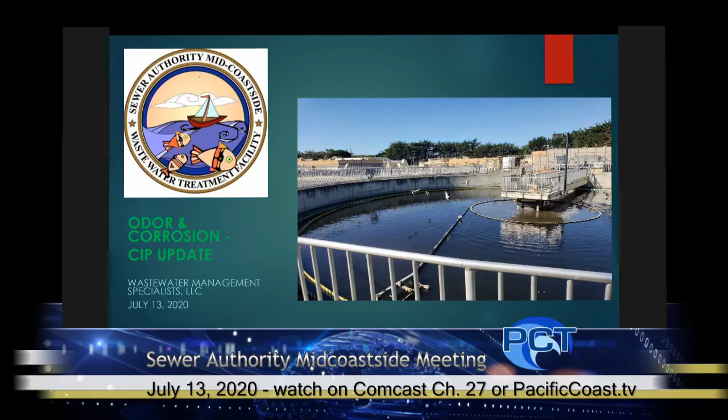So we're hoping, yeah, that noise, I don't know what that is, but it's good. We're hoping that by taking care of the treatment plant, the IPS, and the pump station systems, odors and corrosion will improve. When I talk odor, odor is a big part of the issue because we don't want to cause problems for our citizens having to smell things. But corrosion is hand in hand with odor in the system that we have, and corrosion is really a big deal for SAM. As a matter of fact, let's go through some of these photos now.

We've talked about the corrosion at the treatment plant in the past, and it continues not only at the treatment plant but out in the collection system. There are several things that cause odor in a treatment plant. One is what's referred to as long detention time - the amount of time it takes for water to leave a house and get to the treatment plant. In some cities, that's a couple of hours. In the SAM system, it's several hours by the time it comes all the way from Montara down, and even in Half Moon Bay, some of the more southern areas take several hours for the water to get there. One of the problems is when it's moving slowly like that, the solids tend to settle out in the pipe. You always have a slime layer in a pipe because bacteria and nutrients are going in there.

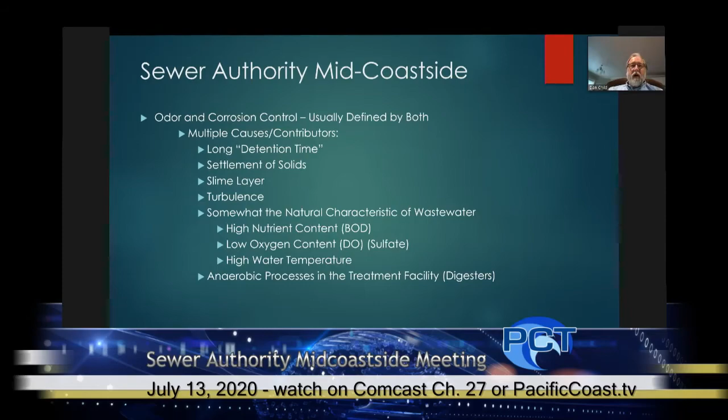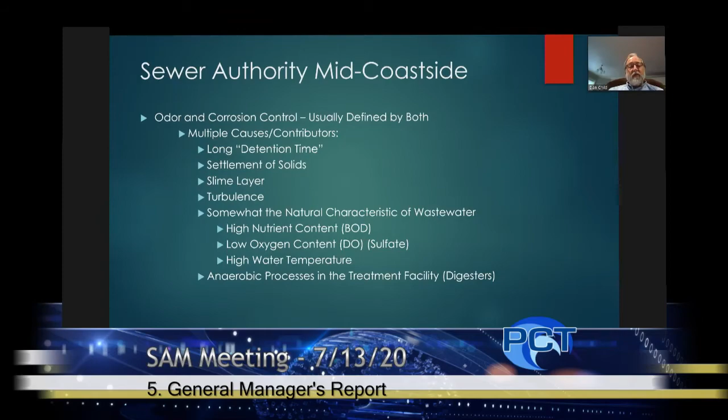Turbulence in the system causes the chemicals in the odorous properties of the water to escape into the atmosphere, and that's when we get both odors and the corrosion associated with that. So natural wastewater has a high nutrient content and very low dissolved oxygen, and once that oxygen is gone, bacteria naturally look for other oxygen sources - they have to have oxygen. The most common source of oxygen in wastewater is a compound known as sulfate, a sulfur compound. The bacteria break the oxygen off of that sulfate and release sulfide ions, and from there you get more chemical reactions that create hydrogen sulfide, which is the primary compound we're worried about as far as both corrosion and odors. Hydrogen sulfide is commonly referred to as rotten egg gas. It smells very strong and can actually be deadly in high enough concentration, so it's something we need to take care of. At the treatment plant, we also have our anaerobic digesters, which naturally produce hydrogen sulfide - they're a non-oxygen process, so that happens in those tanks we're actually working on right now.

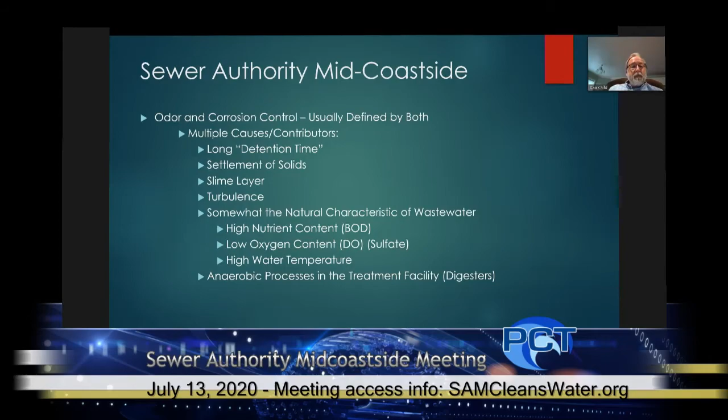You've seen these pictures before, some of the treatment plant corrosion. I'm not going to spend a lot of time going through these again, but I just wanted to remind you that corrosion is an issue. We have corrosion both from the sewer gases and also from the salt water, or the salt air, that we deal with. But we're talking specifically about the sewer gases today.

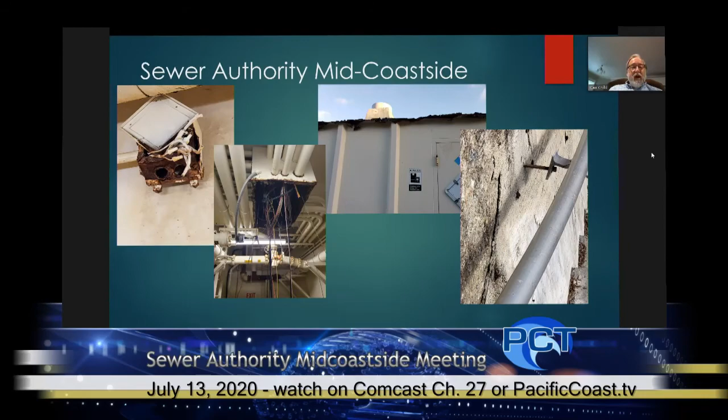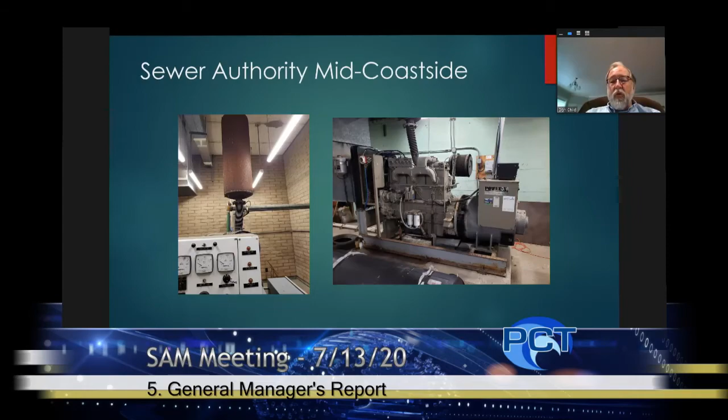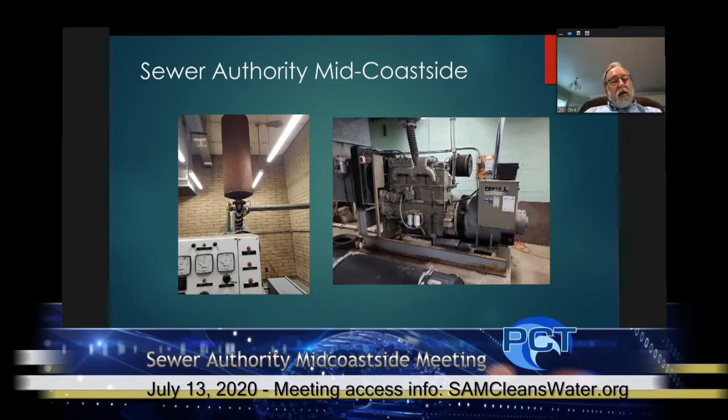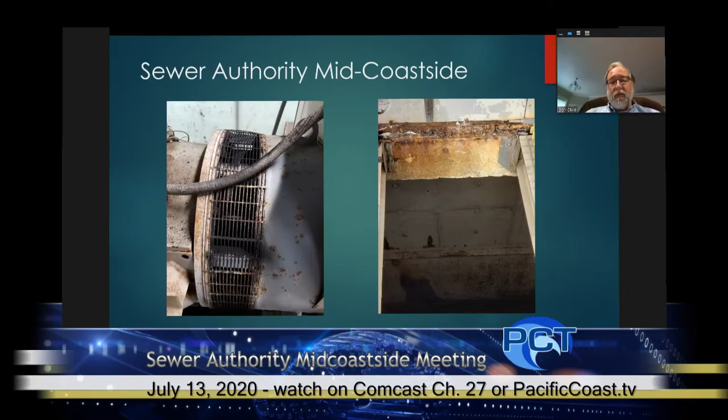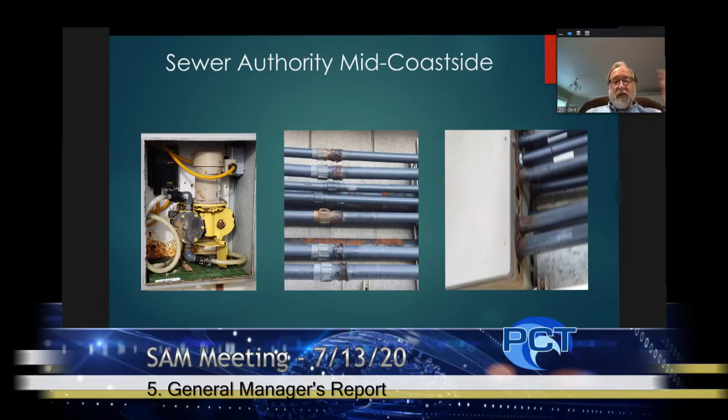I like this picture here on the left - it's the chemical feed system for odor and corrosion control at the Montara pump station, and as you can see, it's starting to rust away on its own. You also have some conduit at the Montara pump station that is corroding. A lot of that is also, as I pointed out earlier, from salt air, but a lot of it is from the hydrogen sulfide gases forming in the sewers.

So hydrogen sulfide is your primary compound. You also have mercaptans, amines, sulfur dioxide, ammonia, skatoles, some more organic sulfides and diamines - these are all just various compounds, most of them sulfur-based. The ammonia is not, and I believe the amines are also based off of an ammonia, but I'm not a chemist so I may have that one confused. But hydrogen sulfide, if we can take care of that, will greatly reduce the corrosion and a lot of the things associated with sulfide reduction.

So what happened on that one?

Okay, so odorous compounds we have here. Again, the sulfides, organics, and the amines. H2S gas is the most predominant.

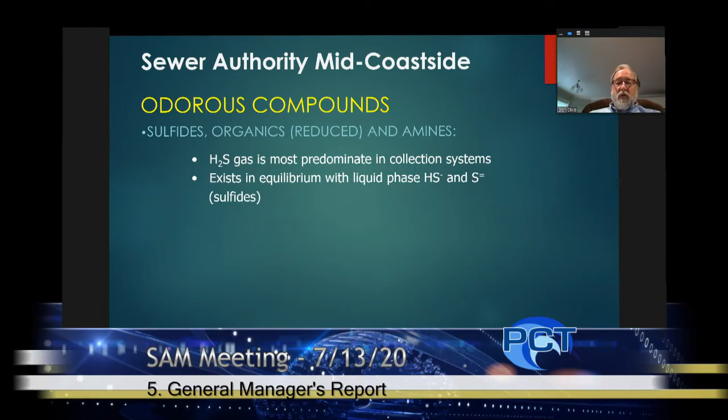One thing you need to remember is it can be in the water and you don't smell it or have corrosion, but as soon as it goes to atmosphere, you smell it. And hydrogen sulfide, the big issue is when it mixes with water, it turns into sulfuric acid, and that's when you get the corrosion.

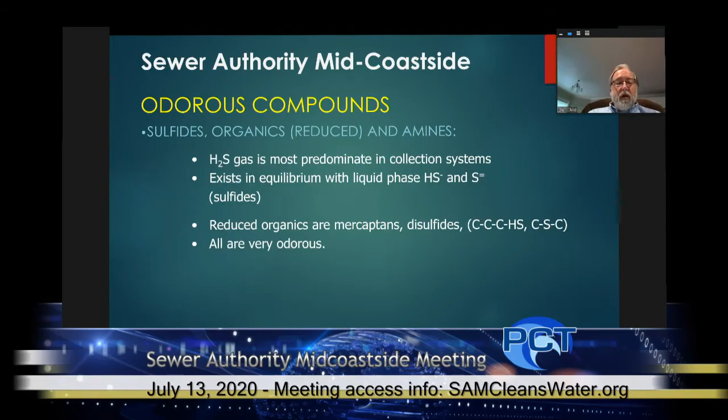So if you have hydrogen sulfide in a sewer system with water, you're going to end up with some corrosion. You also end up with the mercaptans, disulfides. They're all very odorous, and the amines with ammonia.

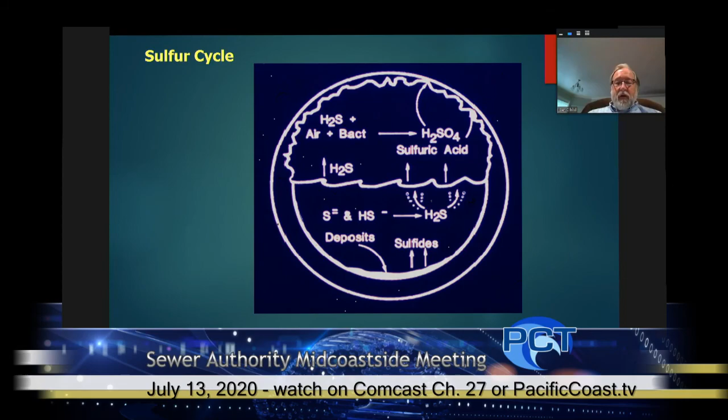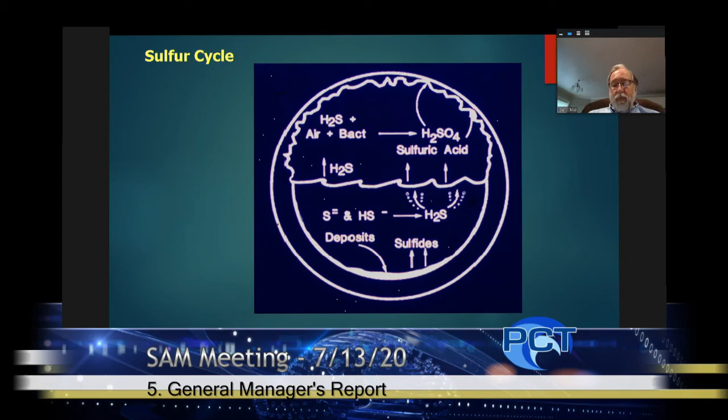So in a sewer pipeline, you typically have water running down the pipe. It doesn't have a lot of oxygen in it. You start getting a breakdown of the chemical because it's consuming the sulfate to be able to get the oxygen. The hydrogen sulfide goes into atmosphere, you get a little bit of water with it, and in that upper right-hand corner, you end up with the sulfuric acid, which starts corroding your pipes and anything else that comes in contact with it.

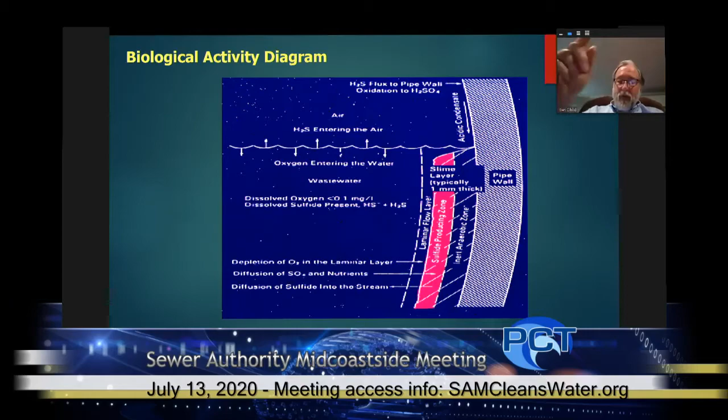This picture here is basically the same thing, but on the right side, right above the water level, that little wavy line says acidic condensate. This is typically one of the two places you get your worst corrosion, right along the edge of the pipe or at the very top in the crown of the pipe. Those two areas tend to be the most common.

And again, it's because the bacteria do not have adequate oxygen to be able to live, so they look for another oxygen source, which is typically sulfate.

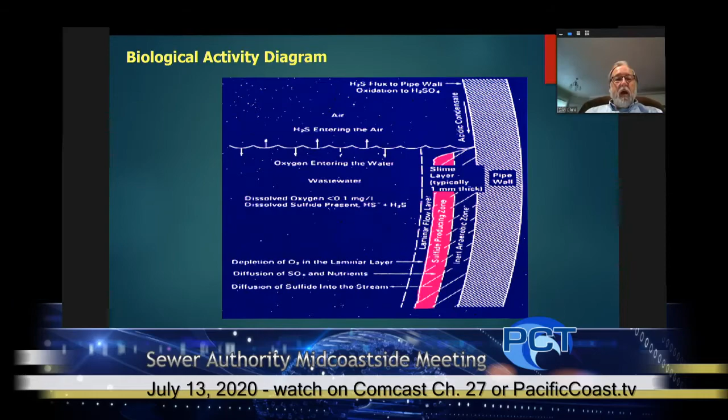And what they determined, Winzler and Kelly Engineering in a report in 2009, more than likely this was due to what they called deposit corrosion, that the deposits in the bottom did not have oxygen in them, so the bacteria living down in that bottom started creating hydrogen sulfide, and you ended up with sulfuric acid in the bottom of your pipe.

So for treatment - question, how did it get turned upside down? What do you mean by turned upside down?

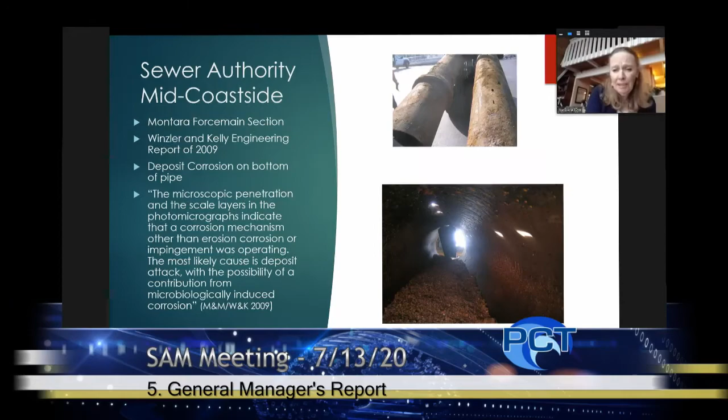Okay, yeah, so this, kind of 10, 11 years ago. Yeah.

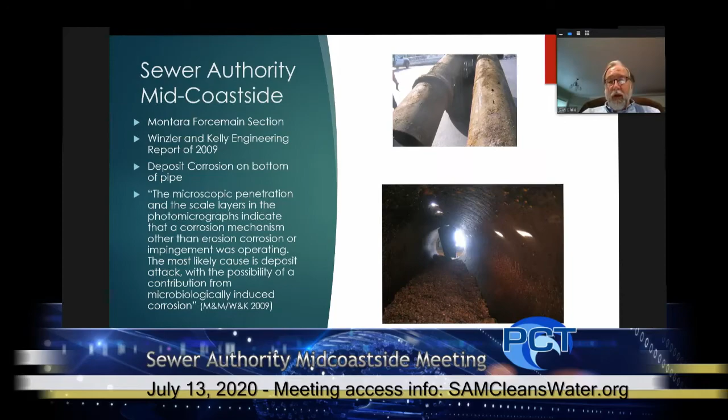But that's why we're doing inspections of all the pipe sections again now. You just got a report on the Princeton pump station a couple of months ago where they went in and did this high-tech electronic scan and tried to identify any weak spots, which that pipe turned out to be in pretty good condition, which was great news.

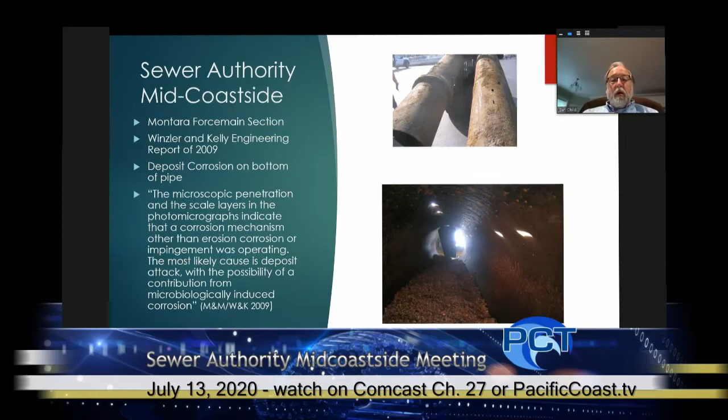From a treatment standpoint, there are typically two types: liquid phase and atmospheric. We're not going to talk about atmospheric tonight because that's literally an odor-only thing. It doesn't help corrosion, and it's very point-source specific. If you have odors at a pump station, you might put in a biofilter, like at the Portola pump station. There are different types of atmospheric treatment, but we won't get into that tonight because the real project we're looking at in the capital improvement program is liquid phase.

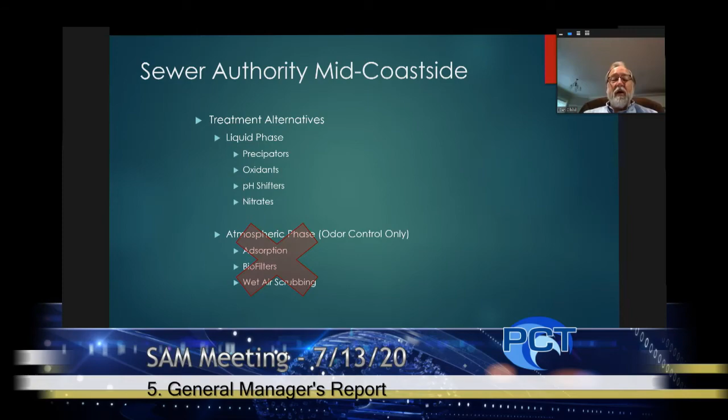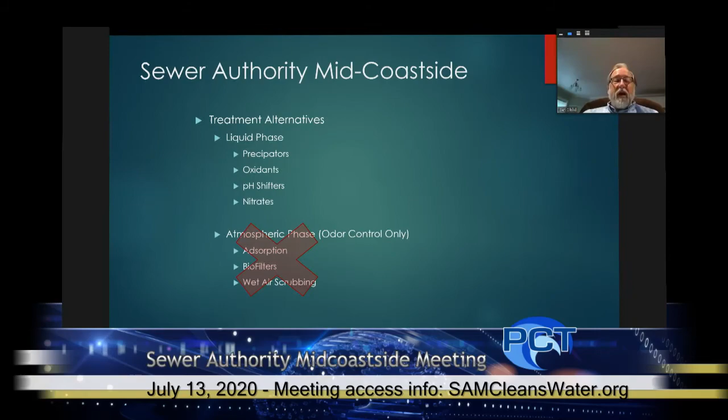Today, SAM has been feeding liquid chlorine into the system for at least 10, probably 20 years, to try and control odors and corrosion. We'll get into why that's probably not the best solution, and we're looking at alternatives right now. I'll go through that and we'll talk about them.

The first thing we have is what's called the precipitation method, typically using either ferrous or ferric iron salts: ferrous chloride, ferrous sulfate, ferric chloride, or ferric sulfate. These react with the hydrogen sulfide and literally bind it together, producing an iron-sulfide particle that settles out. One disadvantage is that it does settle out, giving you more solids in your system that can't be broken down. They need to be removed as a solid once they reach the treatment plant.

It works well and reacts quickly. These are really good for short detention times, up to about 3 hours, and as long as you don't need to get below half a part per million of hydrogen sulfide, it's pretty good stuff. It is a hazardous chemical as far as CERCLA is concerned. CERCLA is a law passed in 1980 that established hazardous material specifications on a federal basis. Most of what we're going to talk about here is considered hazardous material, but there are a couple that aren't.

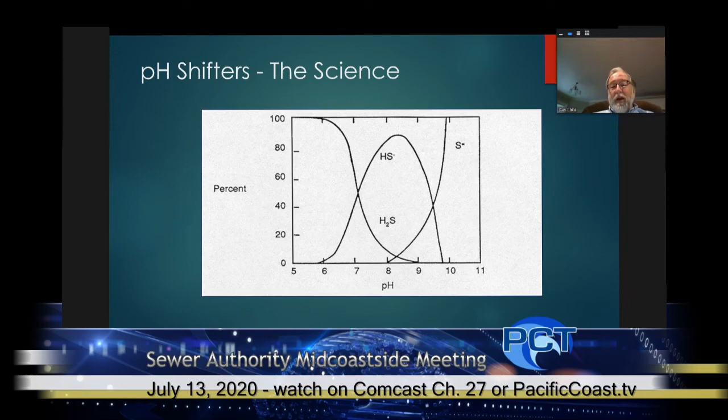The third type commonly used are what's called pH shifters: caustic soda, mag hydroxide, and calcium hydroxide, which is lime. The idea here is to get the pH high enough that it binds the sulfides into solution. You need to run a pH of over 9.8 to have 100% solution, and that high of a pH causes problems at the treatment plant.

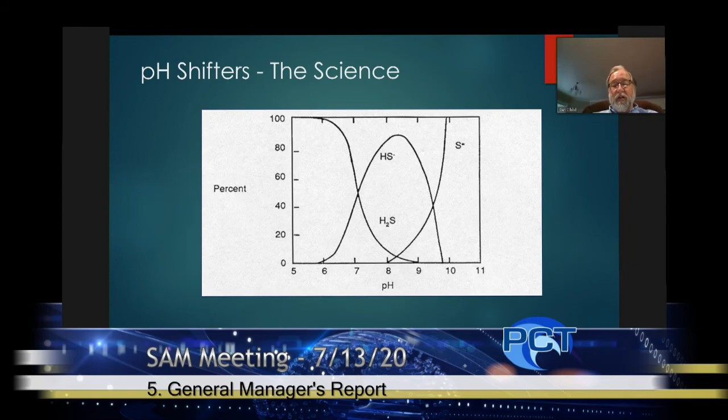This is used in places, but generally pH shifters are good at controlling the odor in one place if you don't mind having it somewhere else. What happens is you'll typically dose it somewhere, and then as the water goes down the line, another line comes in, or it gets to the treatment plant where it gets diluted, and all of a sudden the sulfides get released. I'm not a fan of pH shifters at all, but they have been used in many places.

Caustic soda is inexpensive. It's another hazardous material—very aggressive and hazardous. I've seen it eat concrete floors. It can be pretty nasty stuff, but if you use it right, you can get that pH up over 9 and keep the sulfides in solution.

Magnesium hydroxide is still classified as a hazardous material, but it's relatively safe. It's not super aggressive, but it also has a hard time getting the pH high enough to bind everything, getting over that 9.0 or 9.8 number. 8.3 is pretty easy to work with, and it'll get probably about 70% of it to stay in solution at that level, but you're not getting everything there. So it's another case where you've got to have special mixing and feeding equipment on site to deal with it.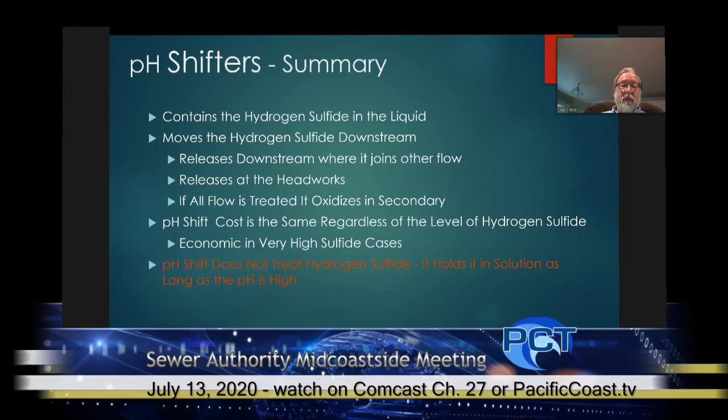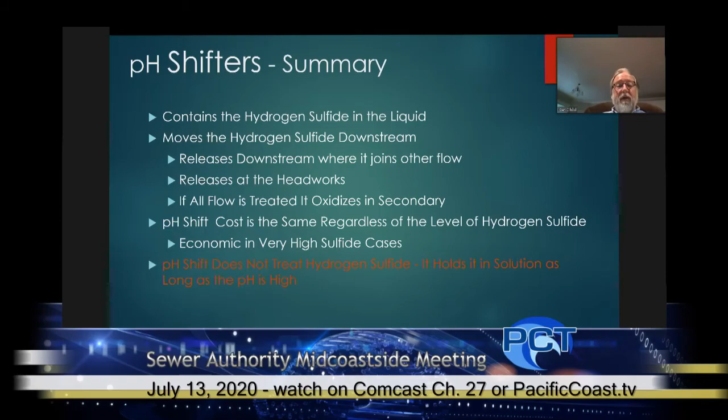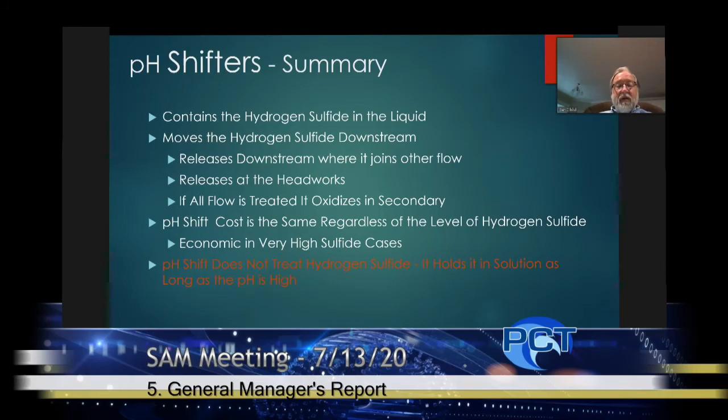So in essence, basically these pH shifters keep the hydrogen sulfide in the liquid stream, move it down to where it gets diluted or goes to the headworks. If it happens to get through the treatment plant, once it reaches the secondary clarifier or the aeration basin, the secondary treatment system, when you start blowing air through it, it's going to strip all that sulfide out and you will have odors there. So one of the real disadvantages is if you have relatively low levels of hydrogen sulfide, your costs are the same as if you have high, because you're shifting the pH of 100% of your flow to be able to contain it. It doesn't care whether it's got 1 part per million or 40 parts per million, it costs the same to change that pH. So it's a disadvantage there.

The last one is providing alternate oxygen supplies. And this is the one that I favor and that we're really looking at right now. As you may recall when we talked earlier, the sulfides and the hydrogen sulfide are formed because bacteria run out of oxygen. In the typical wastewater stream, the source of oxygen they can go after is sulfate, which releases those sulfide ions, and you end up with hydrogen sulfide.

You can inject air for short-term systems. You can literally use an air compressor and pump air into your pipeline. It works for short-term, but you can't typically get enough air in, there's not enough oxygen with it. Some really big places will use liquid oxygen in the same type of a thing. Problem with the liquid oxygen is it's very expensive to buy, and you're dealing with a fire hazard there.

But the most common one these days, and it's been very common since the early 90s, is called nitrate, both sodium and calcium nitrate. Nitrate is a nitrogen with 3 oxygens attached to it. And luckily, bacteria in the wastewater prefer nitrate over sulfate. So if there's nitrate in the water, they will get their oxygen from the nitrate.

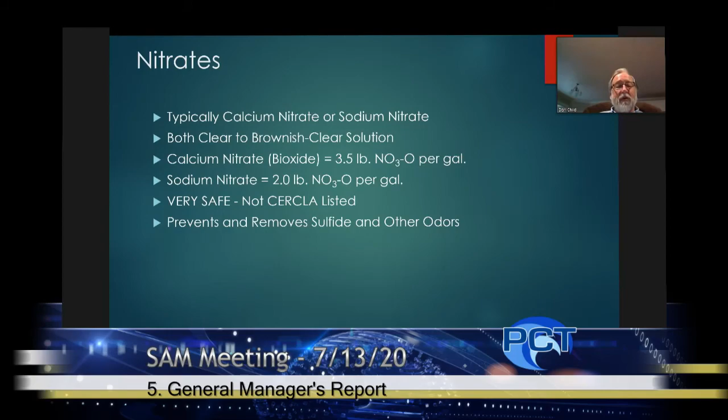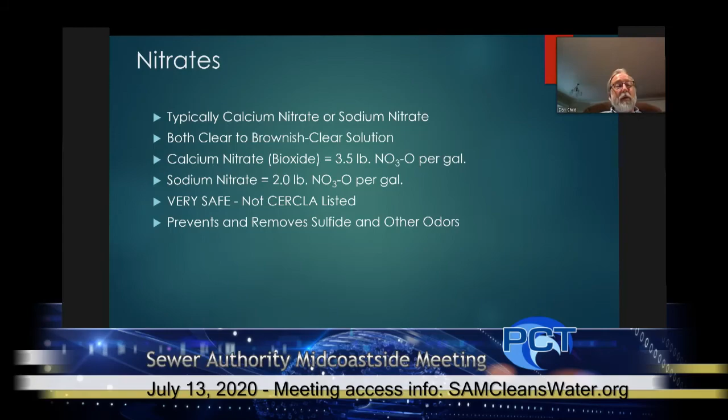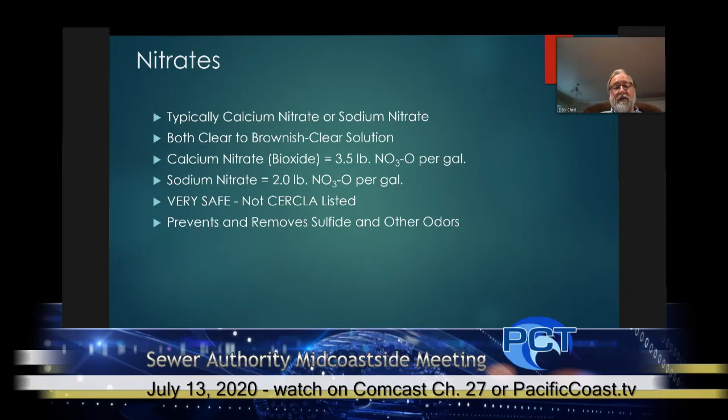They are hygroscopic, which means they will suck water out of almost anything. So if you spill them on the ground, they don't get dry very fast. As a matter of fact, in your climate, they probably would never dry because they will suck the moisture out of the air. But the nice thing about them is not only do they remove sulfides, they will actually prevent sulfides because they provide that oxygen source. So they work well that way.

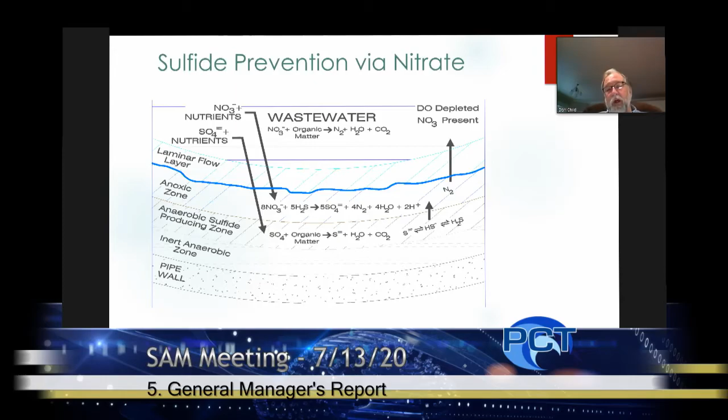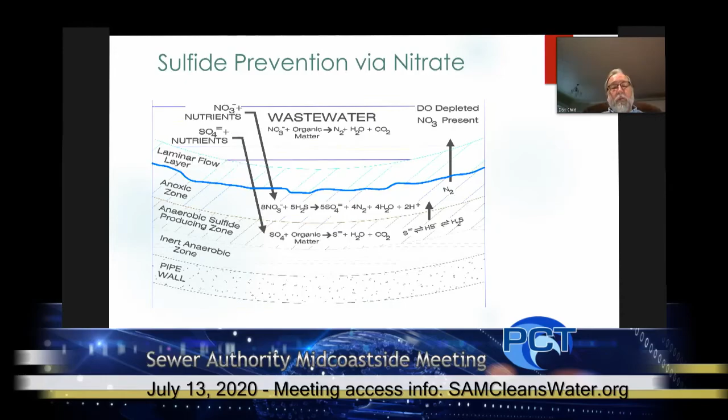These 2 slides are a little bit complicated, but the main thing is this is the prevention using nitrate. Right in the middle of the page, there's a formula that starts with 8 NO3, so 8 nitrates. This is showing that to prevent the sulfides, you have to have penetration of the nitrate into that slime layer. If it's in there, then you will prevent that. It takes a little bit more, and it's not necessarily the best way to do it. It can get expensive. It's usually better to remove it, because if you're removing it, you have some still in the slime layer like shown here.

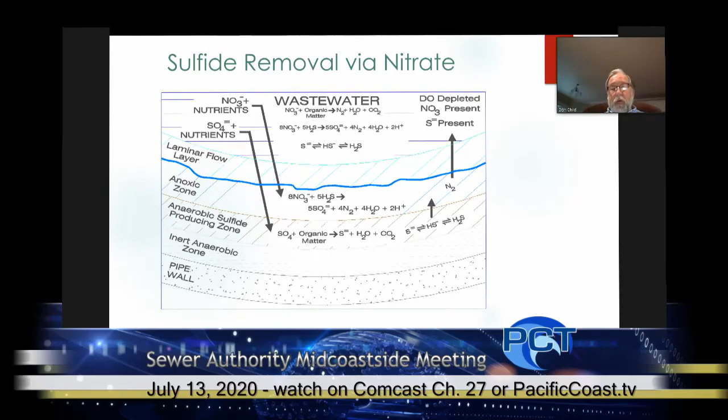But if you go up right under where it says wastewater, the second line down, you also have that same nitrate in the water. So you're both preventing in the slime layer, and anything that's already been formed is removed in the water layer, and you get a double bang for your dollar by removing and preventing at the same time. So like I say, its only disadvantage is it's not quick reacting. If you need to put it in someplace and get rid of odors immediately at that site, it's not the right chemical. You either need to feed it upstream, or find something else, because it takes approximately an hour and a half of detention time minimum for it to be able to get the bacterial cultures going the way it wants to.

It's a natural process that treats a wide range of the sulfide products or components we talked about earlier. You maintain a slight residual coming into your treatment plant, so you know it's treated. You don't want too much of it though, because bacteria like that nitrate, and when they pull the oxygen off, it releases nitrogen gas.

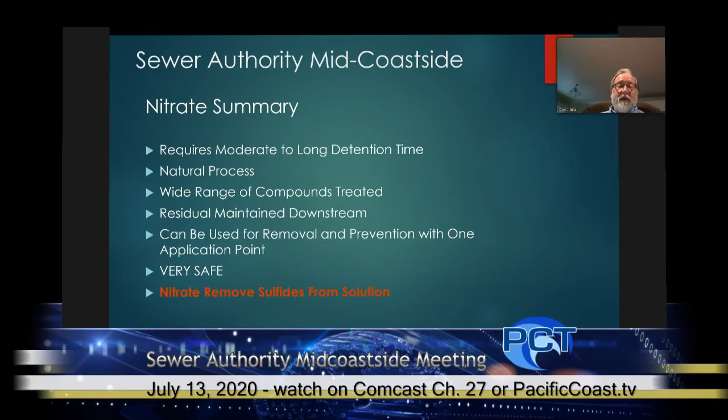So there have been plants that have overdosed, and when it hits their primary clarifiers, the nitrogen breaks off because the bacteria in the sludge are still consuming it, and then the nitrogen attaches to the solids and floats the solids back up to the top in their primary clarifiers. That can create problems, but it's a very, very easy chemical to use.

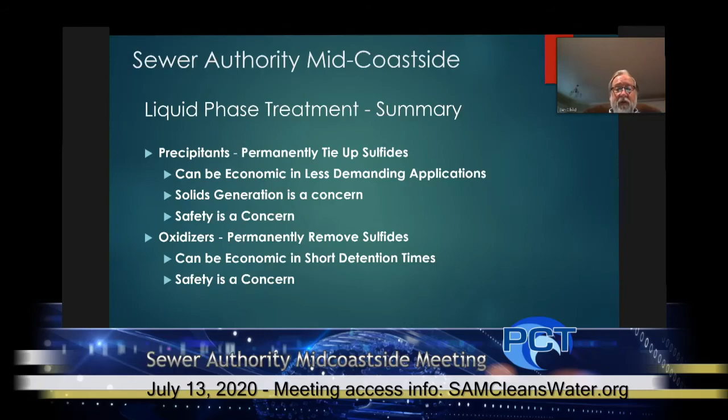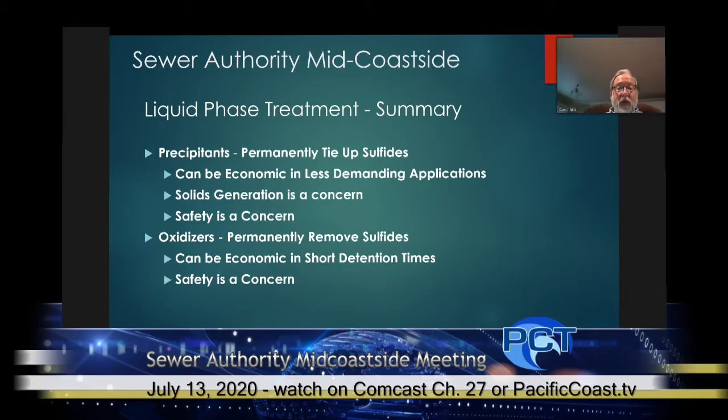It's very clean. It's something that's readily available. Recently we have been working with a vendor that deals with this stuff. Unfortunately, due to COVID, they've been a little stretched thin and having a hard time getting out, but they are scheduled to come test the system to see how strong our sulfide concentrations really are, how much hydrogen sulfide is actually in the water, so we can get a proposal from them on cost treatment. We did have some estimates done last fall and last spring based on stoichiometric calculations. It looks like the cost is going to be equal to or less than what chlorine is costing today, with better results. So we think it'll be a great way to go.

I'm not going to repeat all this. We've already talked about it.

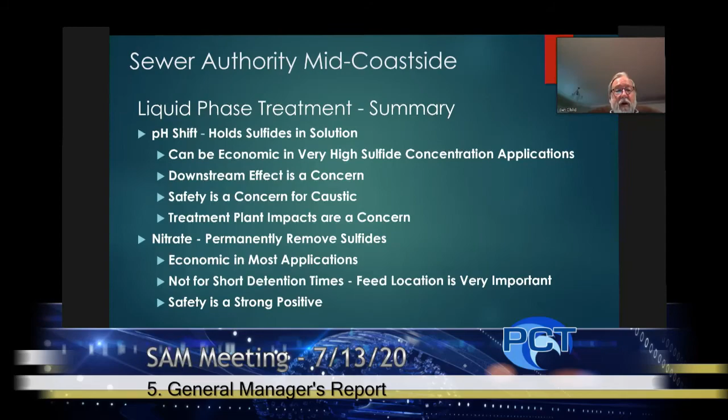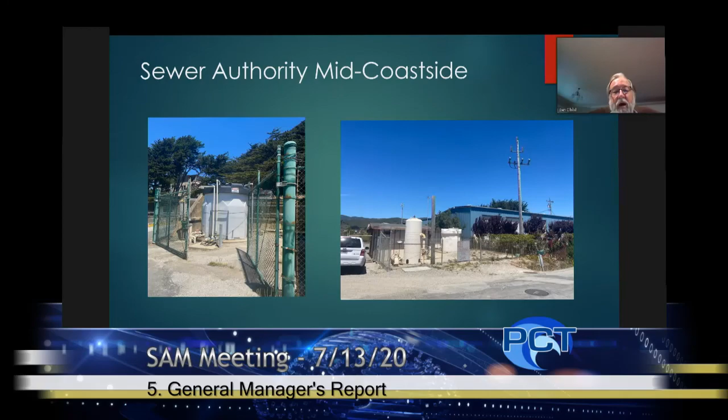One thing, I don't know if it's been reported to you, but right now you are storing chlorine. On the left is at Montara. On the right is down at Princeton. Both of those are double wall tanks, and both of those tanks, the inside tanks have developed a leak. So we're holding this chlorine solution right now with a single wall exterior tank. So these tanks need to be replaced.

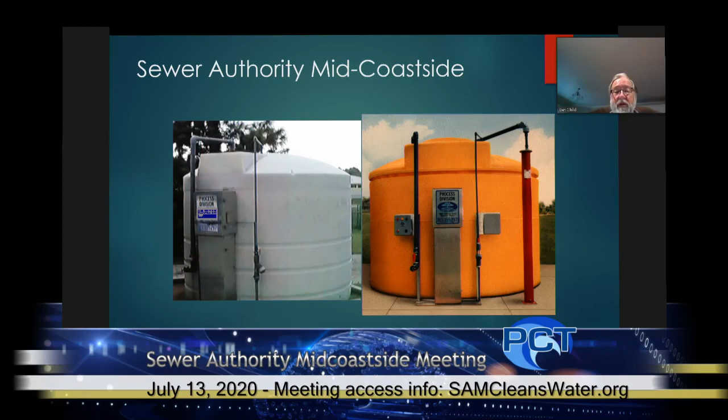One of the things the company we're talking to does is provide turnkey service. They will come in with their double wall tanks. We don't need an orange one unless you really, really want one. It is Half Moon Bay color. Maybe it would work good for the cougars.

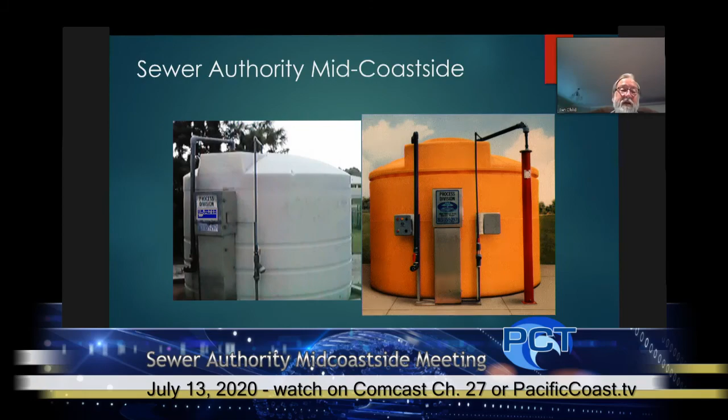But they can provide tanks, or we can buy them, whichever makes the most sense for Sam. That's one thing we've asked for a proposal on, a full service option where they provide all the equipment, operate it, maintain it, and charge a price per gallon, versus if we buy all the equipment at Sam, maintain and operate it ourselves, and just buy the chemical from them. We want to see the price difference in those two approaches so we can determine the best financial decision for Sam going forward.

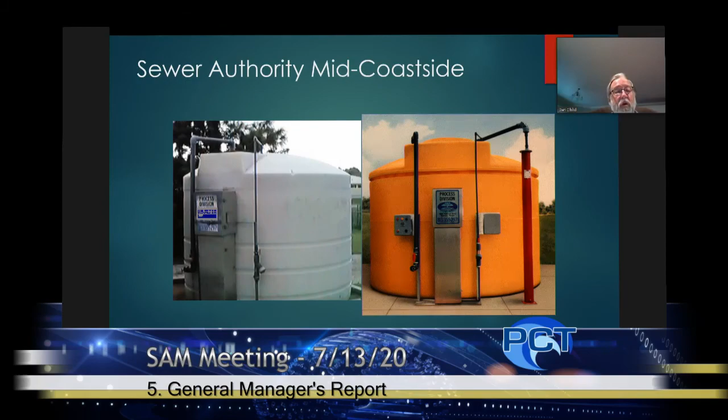They have very simple feed systems, or they have some very complicated ones. In Sam's case, I believe the simple timer-based ones will work fine for you and save you a lot of money, and they're UL listed, so we get a good safe feeding mechanism.

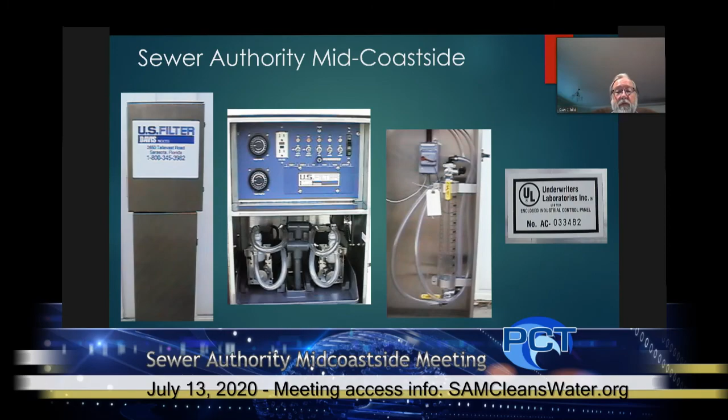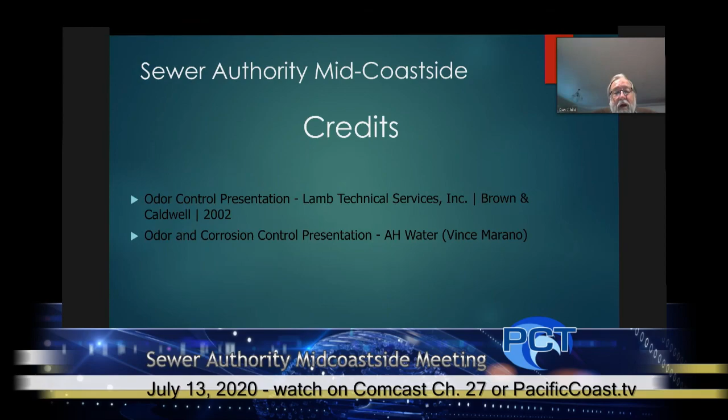So right now, that's what we got. I would like to make sure I point out that Lamb Technical Services, Ed Lamb, and Brown and Caldwell, some of this information was taken from them, and then AH Water, Vince Marano, who did the reports for us earlier. I quoted them both in this presentation. I don't want to take credit for this work that's not mine.

So any questions? Barbara, you're on mute.

Okay, I want to ask about this because it seemed like an important thing. So it sounds like the odor control is really more about corrosion control. I think honestly for Sam, that is true. You don't get a lot of odor complaints. You do have the biofilter at the Portola pump station, and occasionally it will get overwhelmed.

I'm not personally a big fan of biofilters. Some people have had good luck with them, but they're very temperamental. They require that you feed them a very constant feed all the time. If you have a very constant feed, they work good, but your system's not that constant. So you're essentially looking at adjusting the way we're treating pretty much everything that comes into SAM from the north, to reduce the corrosion potential of the sludge, as it were.

Okay. Is that correct? Say it again, I want to make sure I understood you. You're looking at tweaking the way we treat material coming into SAM to reduce, throughout the whole system, the corrosion potential, to improve the way it arrives and goes through the process at the plant. Is that right? That is 100% correct. Yes.

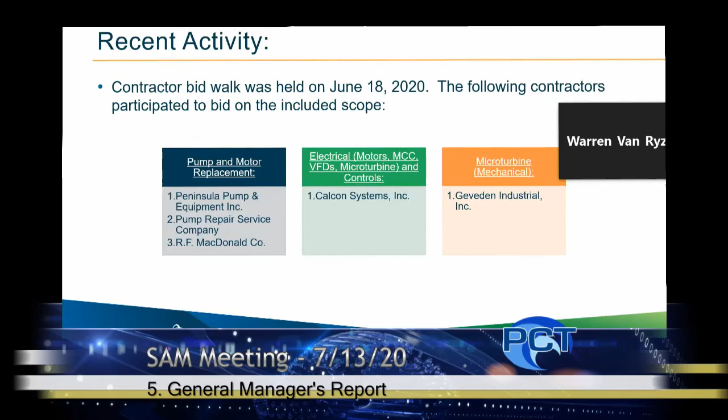These are the list of companies that attended. There were a few more that were invited, but they declined to come out. One of them was GSC Construction. For pump and motor replacement, we have some of the familiar faces like Peninsula Pump, Pump Repair. RF MacDonald was also interested.

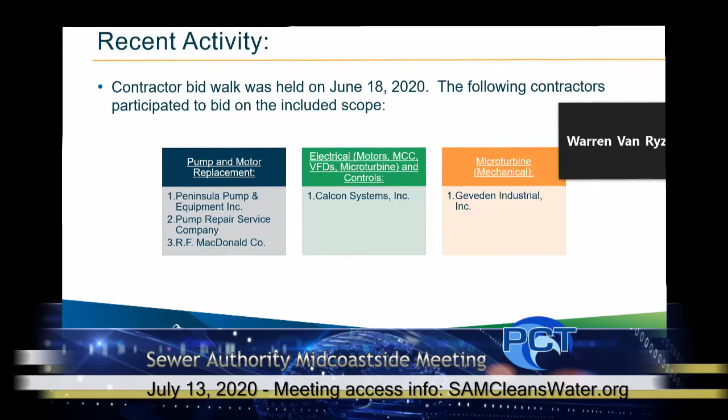All the electrical components of this project, including motors, motor control centers, VFDs, all the microturbine electrical - Calcon is submitting a bid on that. And then for the mechanical microturbine scope, we're working with Geveden Industrial.

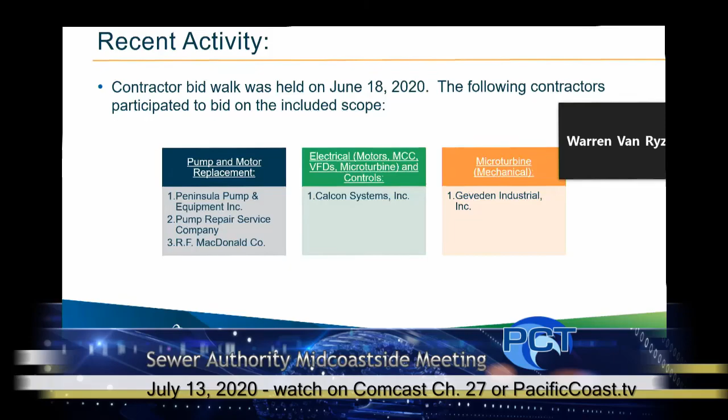So I'm expecting bids back this Friday. I will be repopulating my energy model with the updated numbers, as well as some new items I have included, and the up-to-date energy savings calculations.

We'll go back and solicit an interest rate and term from our financier, tie up any T's and C's, any type of operating and maintenance expenses, repair and replacements on specified intervals. And then we'll be looking to come back to the board in August to present our final package.

So that was pretty quick and sweet. There was some more detailed information in the packet that I provided to Kishan that he put in his staff report. But if there are any questions, please feel free to let me know.

Thank you. Do we have any questions from the board? Barbara, go ahead.

So is it costing us more because of our audit? So as far as the final project cost or the cost for the study? The financing costs for all of it - the funding. Is the funding going to be at a higher interest rate because of the 17-18 audit?